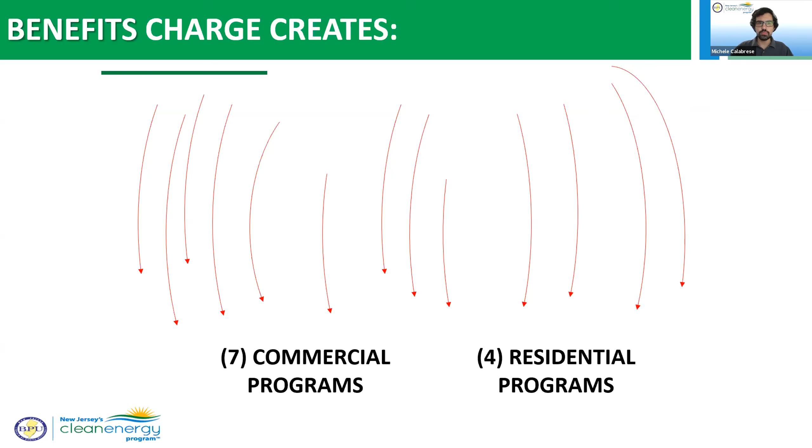We have rebates for existing homes. We work on both existing and new construction. And on the existing side, you have your prescriptive rebates, which is installing X piece of equipment, homeowner gets X rebate. And we also have performance-based, our home performance program, which is whole home solutions. So things like air sealing, insulation, plus HVAC measures.

And in New Jersey, we're really fortunate to have probably the most generous rebates. So we have up to a $4,000 rebate and 0% financing up to $10,000. So just wanted to mention these.

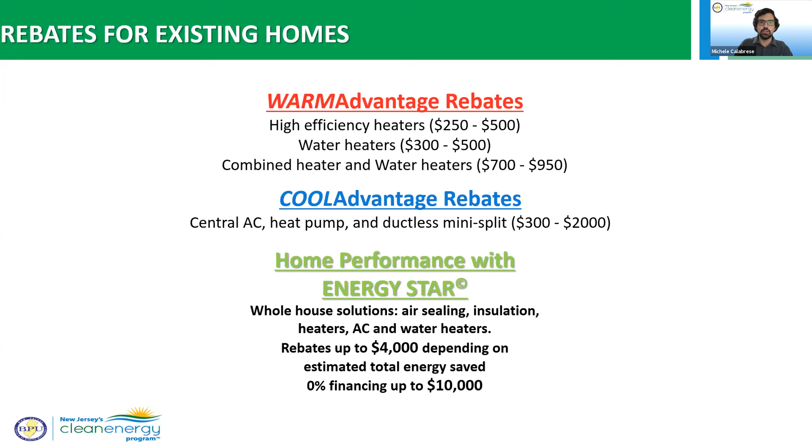They're always worth knowing. Not everyone's always building from the start, but with residential new construction, the way our program works is our homes are evaluated by qualified participating raters credentialed through RESNET. And these rating companies work with the builders to build or reconstruct homes to energy efficient standards. So we can also have gut rehabs in this program.

And essentially the rating company, their job is guiding the builders through every step of the way. So they're making sure all the paperwork's on time. They're making sure that all the checkpoints are built. And they're really alleviating the paperwork load, because we all know with rebate programs, with permitting, paperwork's the biggest problem, right? Everyone hates paperwork. So the raters are there to help. And then the builders are receiving incentives for building energy efficient homes.

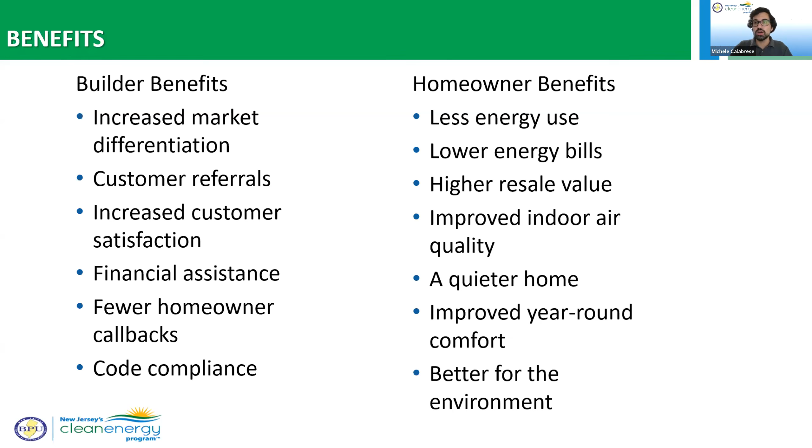We've been in our homes for a while, a lot of us, and the idea of being comfortable in your home and how much more comfortable these energy efficient, zero energy, passive house homes are, it's a huge deal. We all know that room in the house that's too cold or too warm this part of the season. It's just something we're starting to notice because we've spent a lot of time in our homes and we might be here a little bit longer. So those are just things that we always love to highlight.

As far as eligibility, pretty much, you name it, it's eligible. Custom and production homes, single family, townhouses, and then multifamily on both the low rise and high rise. So if you're building in New Jersey, there's probably some sort of fit for you.

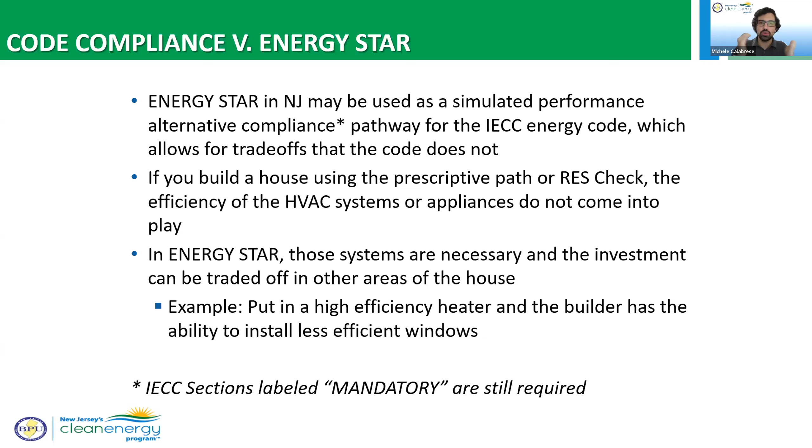So with this program, with our code compliance versus Energy Star, one of the things builders really like is we give them a little bit of flexibility. So they are able to just maybe change a few things in the code; obviously you can't change mandatory things. But one example, they could put in a high efficiency heater and then the builder has the ability to install less efficient windows. Obviously it's not something you do in a passive house, but just something we'd see typically on our code compliance and Energy Star, giving the builder a little bit of flexibility to work in the program.

Energy Star homes, as far as it goes with homeowners, these are great because homeowners know what Energy Star is. They've seen the logo on their fridge and they go, is that the same thing? And yeah, it is. And these homes are designed and built to standards well above other homes on the marketplace. They're not as efficient as passive house, but they're a really good intro point. And they're better quality, comfort, and durability. And they're going through inspections, getting checkpoints, and they're increasing that home value in the future.

We also have our zero energy ready homes. And these are similar to passive house in a lot of ways, right? These are a symbol of excellence in energy savings, comfort, health quality. And these homes are so energy efficient that all or most annual energy consumption can be offset by renewable energy. And just like passive house, these are the homes of the future. These are what we want to see everyone building to. Passive house, zero energy ready homes, those efficient homes that really lower the carbon footprint and they lower the amount of energy used. Because like Sean said, the building stock uses a lot of energy in our state, and that's true everywhere.

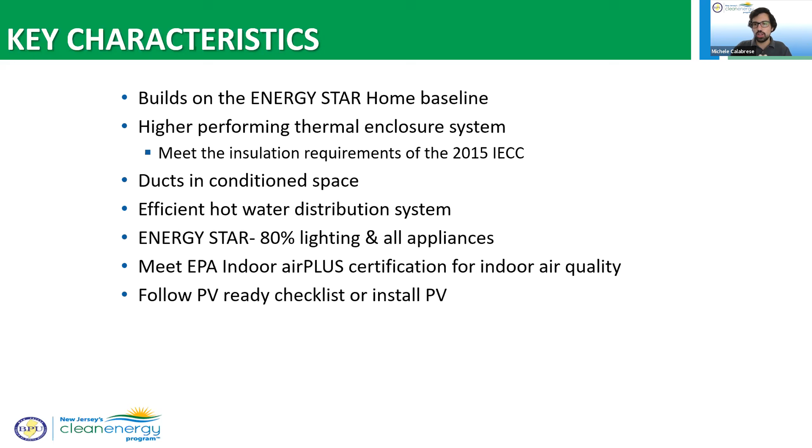And the key characteristics on a zero energy ready home, you're building on the Energy Star home baseline, but it's a higher performance thermal enclosure. You also have really efficient heating, cooling systems, as well as lighting and appliances, and they're meeting that indoor air quality Air Plus certification. So the homes are, again, nice and tight. There's a lot of great indoor air quality. If your home's not tight, leaky and drafty, it's cold, but a lot of contaminants get in, can flare up asthma, things like that. And your typical homeowner doesn't really think of these things. So it's just something that we always love to mention. And they're all ready to install PV, if they're not already installing the photovoltaics.

So the incentives, and I'll just go through these quickly just to give you an idea of what we do in New Jersey. So basically every single level, Energy Star, zero energy ready home, and zero energy ready home plus renewables, and I'd be pointing at the screen normally, but our new virtual world, there's a baseline incentive. So on Energy Star, you get $1,000 no matter what, if you're doing a single family home. For zero energy ready, it's $4,000. For zero energy ready home plus renewables, it's $6,000. And then we give out a performance-based rebate on top of that. So $30 per MMBTU saved. And this is based on a model, obviously, since it's new construction. So the more efficient a home is, the more money towards that work. And the builder, they're getting that money.

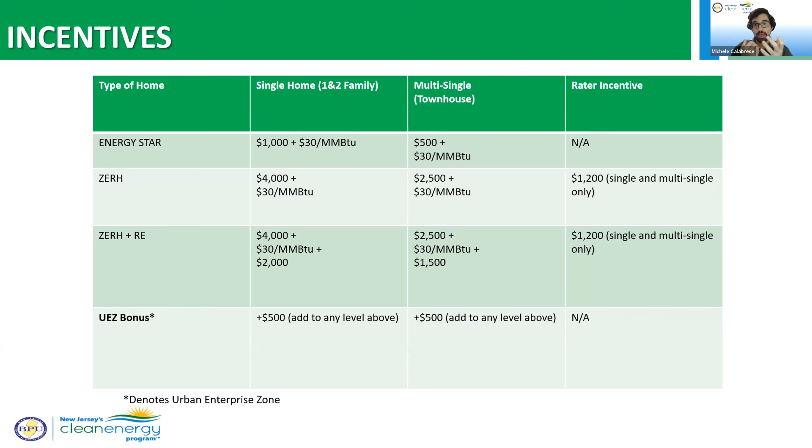So they're incentivized as well, because we also have incentives for multifamily. And these can be pretty lucrative. So you see $500 there for Energy Star. These are per unit. So if you're doing large projects, these really add up. We have zero energy ready home for multifamily as well. Not for multifamily high rise, but it's on that zero energy ready if you're doing a smaller multifamily home.

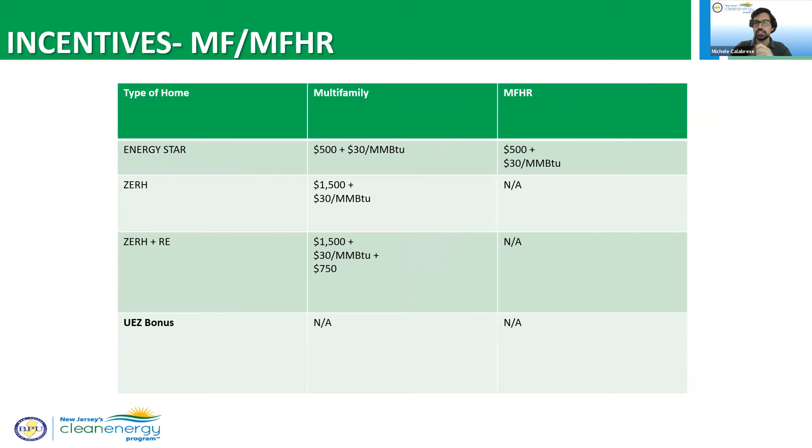This is another program I always love to mention. If you're building in New Jersey and you've participated in our program, we have co-op marketing for builders. So if you know any builders who are doing work and want to participate in our program, it's a 50-50 cost share for eligible marketing measures. So basically up to $50,000 in marketing initiatives. Let's say they're doing some sort of print ad or television ad. They're doing a $5,000 ad. We'd refund them $2,500. So if they're working in Jersey and participating in our program, there's free marketing dollars out there for them.

And there's really no reason not to take advantage of something like that, because we always want more marketing for these programs. We want people to know about them, to be excited about that energy efficient standard, because we all know that homeowner awareness is what drives the market. You know, builders here in this room are probably more on the energy efficient side, more into this, but a lot of your common builders are kind of like, we've been doing it this way forever. Why should we change? So homeowner awareness, them being aware of what's out there, that's what drives the market.

But our programs, we're really fortunate to have great rebates, and they're very exciting programs. And we're pushing the standard forward with Zero Energy Ready. And that relates to Passive House, right? These are the homes of the future. We want people building these homes.

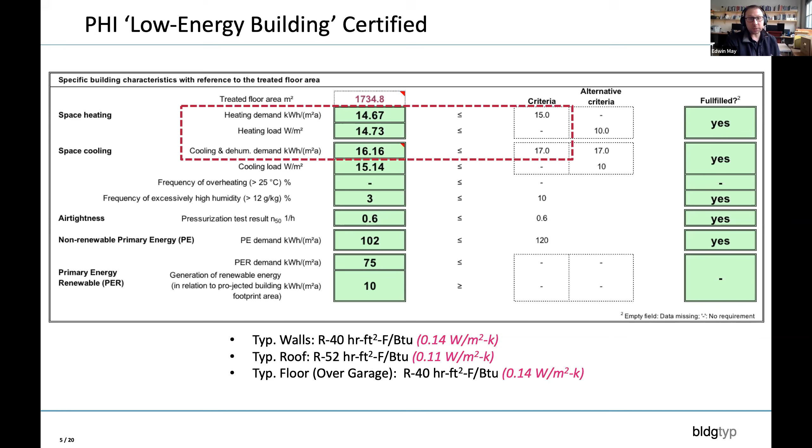So this project was certified to the International Passive House Institute certification, and for those who aren't familiar, passive house certification is just another type of green building certification, very similar to LEED or Living Building Challenge, Energy Star, as we were talking about earlier. It's another green rating system that prioritizes energy conservation, as well as health and durability and comfort of the occupants. So it's a relatively narrowly targeted certification that really prioritizes those few elements and does a really good job at those. We've been working with the passive house standard for about a dozen years now, and had a lot of experience with all types of buildings. This was our first, though, of this scale for sure.

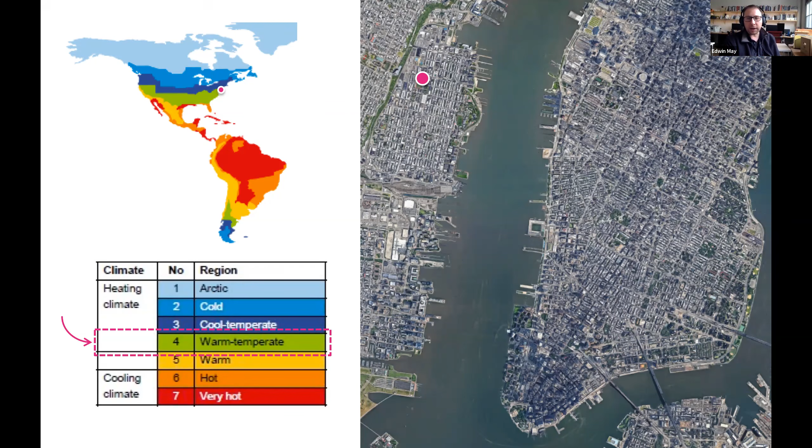And this building had a lot of challenges compared to some other projects that we typically work on. Number one, this building is in a very dense urban environment. So if you're not familiar with Hoboken, New Jersey, just across the river from Manhattan, it's about as urban as it gets. When you think city, this is what you're thinking about. It's in a warm temperate climate as far as PHI is concerned. So we have to struggle with both heating, but also cooling and dehumidification. Of course, in a climate like New York City, dehumidification is a really big piece of the puzzle. And as I said, a dense urban neighborhood.

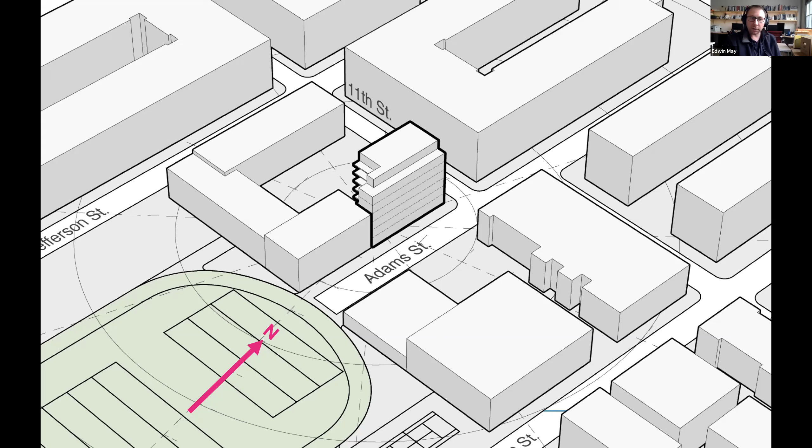This is an infill project. It's not a greenfield site. We're not out in the middle of a potato field with all the ability to orient the building however we want. We had a north and east facing site, and that was how the building was going to be. Almost no useful solar gain on the project. That's actually okay on a project of this sort. And we had all sorts of challenges when it comes to the actual site itself. So right out of the gate, not terribly optimal as a passive house, right? We had a lot of constraints when it came to the site, not a lot of good solar orientation. Okay, fine. We're going to work with it. There's nothing you're going to do about the site. The site is the site. You're not going to spin the street grid of the city.

The other real challenge, or one of the other real challenges on this project, was from a compactness perspective. So if anybody here is a certified passive house designer, in the training we go on and on about compactness of the building and how it really helps us to deliver cost-effective passive houses if we can form the building from the very beginning in a compact shape. Well, for all sorts of reasons, a lot of them related to the specific site, the street wall, as well as the zoning, and then, of course, flood issues in Hoboken.

For all sorts of reasons, we were not able to build a terribly, quote unquote, compact building. So obviously we have to hold the street line on the north and east side there. We have some zoning setbacks to deal with. We want to carve out some outdoor space for the people who live there. And then we take the whole building and we lift it up off the ground.

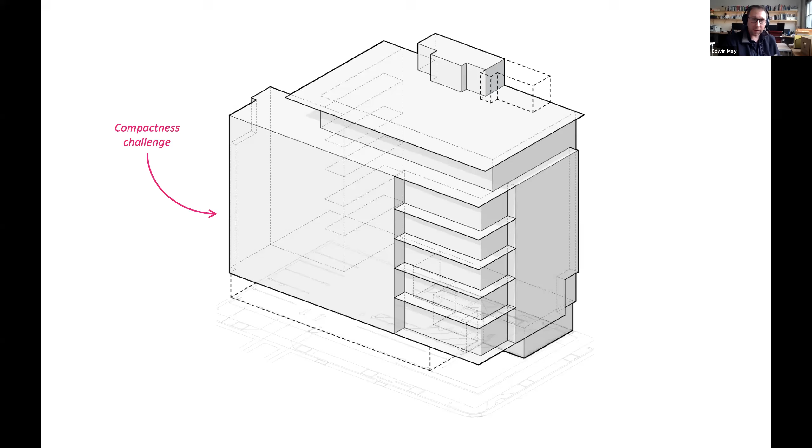That's very typical in a place like Hoboken that suffers from regular flooding and of course suffered very badly during Hurricane Sandy. So right out of the gate, we have bad orientation or challenging orientation, and we have a challenging form factor because we're very exposed as a building. But again, these are kind of just things that are set, right? We don't have the ability to control these things. This is what the building is, and we have to build or engineer our passive house to accommodate.

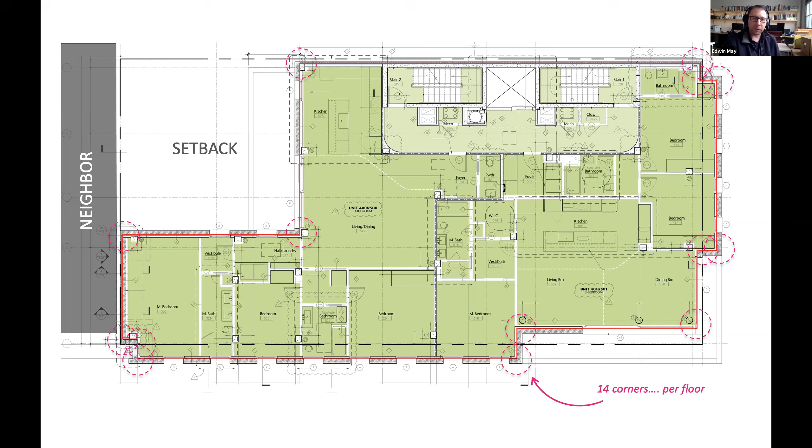Just quickly, the floor plan of the building, you can see a representative floor plan here. Again, neighbors on the south and future neighbors off to the west side. In this drawing, north is to the right. So you can see the street front on the bottom and street front on the right-hand side there. Difficult form factor again for the building, but again, all related to the context of the building and how it was shaped to form itself to that urban site. But you can see the core and you can see the nice big living spaces there, which were great.

And then lastly, of course, the biggest challenge was that this was going to be a commercial property, commercial construction style property, meaning concrete floor slabs, steel stud construction, not very passive housey, all things considered, right? When we build single family home passive houses upstate or outside of the city, we're using things like wood and cellulose insulation, fibrous materials, much more accommodating to designing out things like thermal bridges. We'll talk a little bit about thermal bridges if you're not familiar with that term.

Very challenging construction type, in addition to really challenging construction environment. Very constricted site, not a lot of room, not a lot of space to move around. Really, really a difficult environment to build a building in at the best of times. And we were asking these builders to go above and beyond and do something that was really out of the ordinary. So hats off to the builders, to John's team for managing that side, and the actual construction implementation team. They did a great job with all of the crazy curveballs that we threw at them in terms of the actual fabrication of this building.

And of course, from the engineering side, we did have to accommodate some of the things that were just set. We're going to use steel stud. We're going to use concrete floor slab. We're going to use a lot of steel. It's a commercial property in a dense urban environment. So we just had to work around that from a passive house perspective.

Now, why is that challenging? Again, if you've gone through the passive house designer training, you're going to be familiar with this term thermal bridge. But if you're not, a thermal bridge is just a break in the insulation layer. That's the easiest way to think of it. And so think about something like a steel stud. If you're going to insulate around the steel stud, that steel is going to pass right through the insulation layer. So you're going to have a significant amount of extra heat loss as a result.

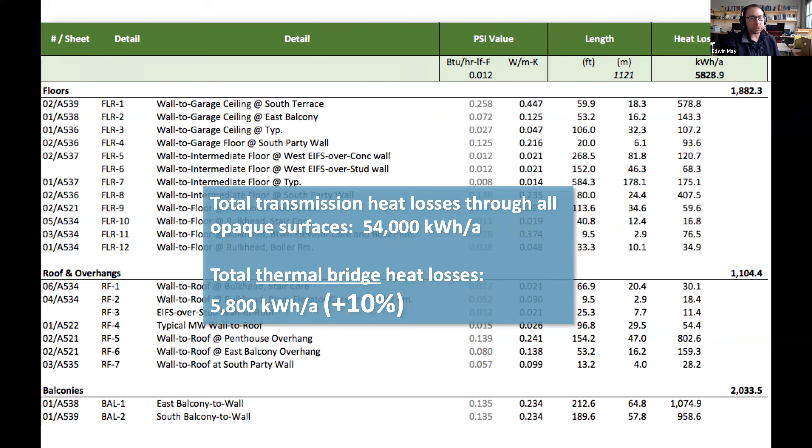On this specific project, we actually found that there was about 10% additional heat loss as a result of all of those thermal bridges. And that's after a huge amount of work by John's design team and our office to try and optimize these details. So this is after an incredibly rigorous, very laborious back and forth around the actual design and optimization of these details. So even in the best case, we're still seeing about 10% additional heat loss as a result of those thermal bridges. And so we just have to design that in from the beginning. We have to do the engineering for the passive house design, knowingly incorporating those details.

So how did we build the building? Well, the building is built with steel stud backup wall. And then essentially what we did was we put a thick wool sweater around the entire building. So passive house prioritizes reducing heat loss in winter, reducing heat gain in summer. And the main way that we're going to do that is through lots and lots of insulation.

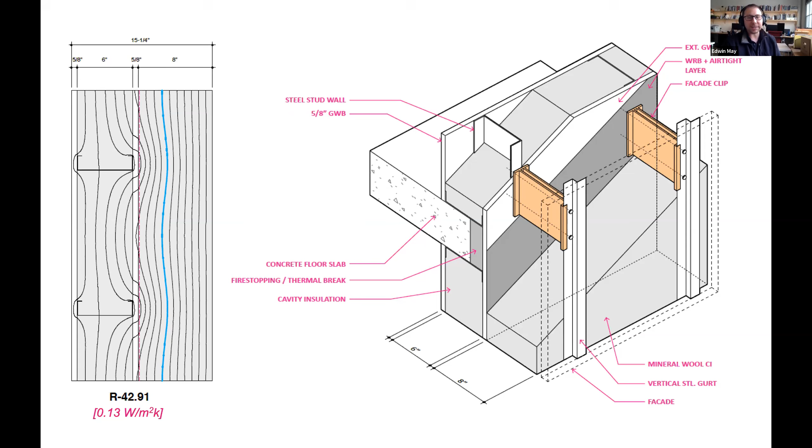I know that's not very sexy. I know that's not very exciting, but the fact is that insulation is probably the best, most cost-effective, easiest tool that we have in our toolkit to reduce energy consumption in buildings and improve thermal comfort. And so we put this big, thick wool sweater on the building. We use low conductivity facade connections. We design out those thermal bridges as much as possible with the recognition that it's still a commercial property development at the end of the day.

Here you can see the construction team actually implementing that exterior facade wall, 8 inches of mineral wool over that steel stud backup wall. And then we have this sort of floating facade, which is only attached back to the building by use of these low conductivity fiberglass facade clips. So if you're not familiar, that's a system made by a company named Cascadia, obviously hugely laborious, right? A lot of work, a lot of steps, very difficult. And the first time that these fabricators and builders were implementing this technique.

So again, real hats off to these guys. They did a fantastic job with it, the very first time they'd ever even set eyes on this system. So really, fantastic in terms of the final. But it was very challenging. They really did have to work at it, and it was very difficult. There's definitely a learning curve with a lot of this implementation.

Here you can see the team actually installing, this is on the back side of the building there, 2 layers of 4-inch thick mineral wool insulation over the exterior of the building. Mineral wool insulation, if you're not familiar, it's a fibrous insulation essentially made of basalt stone. It's non-combustible. The pests don't like it. It's a great material to use on the outside of a building, like the one here. Very durable, very resilient in many respects, and obviously really works very well as an insulation product.

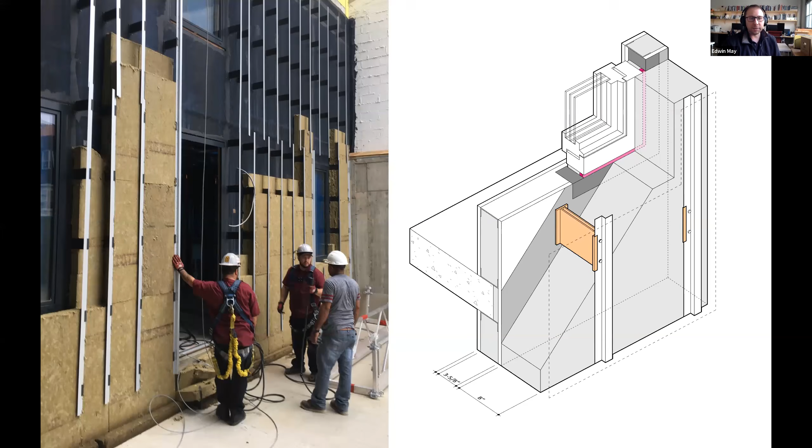Now, one of the other techniques that we use in Passive House world to reduce energy consumption, improve thermal comfort, improve durability, is to rigorously air seal our buildings. So in addition to super insulating the buildings, we want to make sure that they're as airtight as possible. That doesn't mean that you can't open the windows on a beautiful day. On a beautiful day, throw all the windows open. But it does mean that in a cold winter day, or a really hot, humid day, we have the ability to seal up the building, and we're able to manage the moisture that's coming in and out of the building, riding on those air streams.

And so rigorous air tightness was one of the other things that we had to implement here as part of the Passive House standard. And again, hats off to the construction team. They did a great job meeting those incredibly rigorous Passive House air tightness targets.

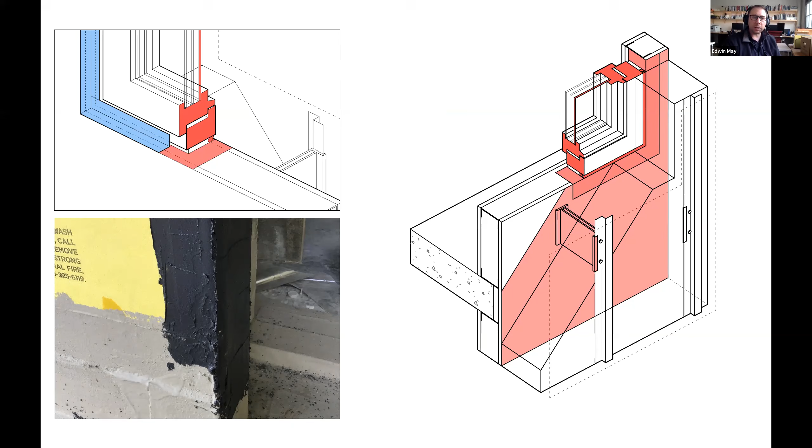Because of the way we designed the building, we were able to use the weather resistive barrier, the WRB, which is the main waterproofing layer, as the primary air tightness of the building with just a few modifications to the typical details. So we went a little above and beyond, but not a huge change in the way that we went about the air tightness of the building, just a little bit of thinking ahead and planning ahead.

Now, when it comes to the windows, I think this is a really interesting detail. I like to show this mainly because it wasn't something I designed. This was something that the fabrication team and the installers came up with. The goal here was to take a little bit of the insulation and overlap it over the windows themselves. So when it comes to window installation and detailing, one of the techniques we use in Passive House world is to take some insulation over the face of the frame. That's going to help us improve thermal comfort, improve temperatures, reduce condensation risk, as well as reduce heat loss, so thermal performance.

And the goal here was to take that insulation over the face of the window, and yet we still had this really deep reveal on the sides and top of the window. We had to somehow take the cladding and return it into that opening there without actually causing a thermal bridge. And what the team came up with was this detail where they have that floating steel angle, which is actually attached to the exterior structure and cantilevers back towards the building.

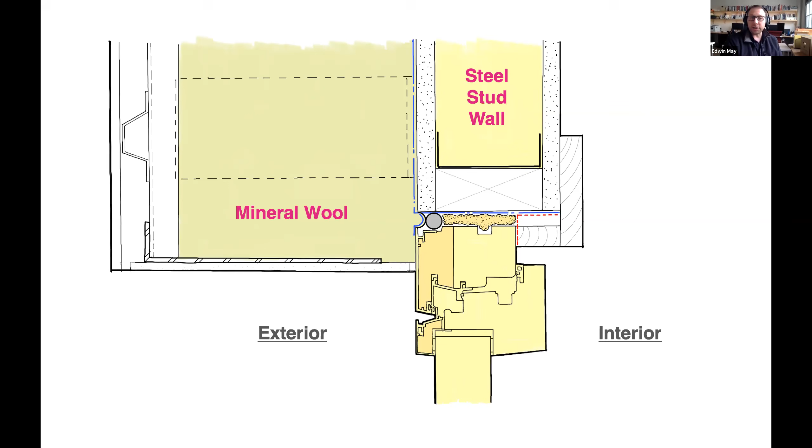It's able to fully support all the cladding and the trim without actually attaching or touching the building. So we don't have any thermal bridge in that case. So we're able to get the full improvement or the full performance of that overlapping insulation there.

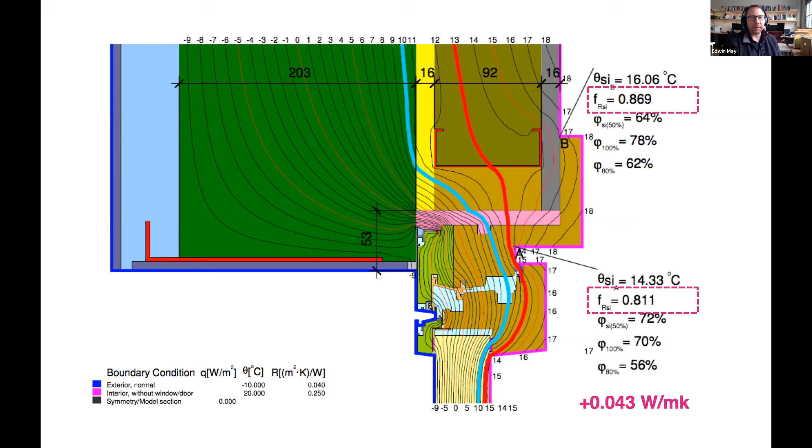This is an example of the type of simulation and assessment that we do on these types of projects. Every detail is calculated and simulated for both interior side surface temperatures, so looking at condensation resistance, as well as overall heat flow and interstitial temperatures. So these lines here, if you're not familiar with these types of graphs, these lines show interior temperature distribution. So it basically shows you how the thermal energy is moving through the details. So we do this for all the different construction details, window details, etc.

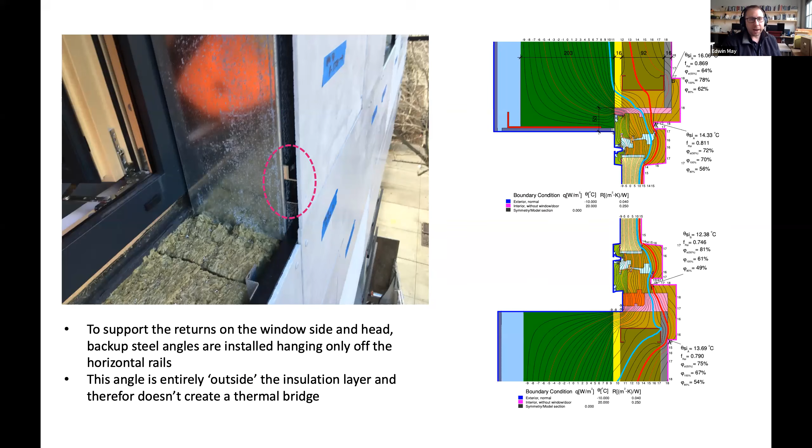But again, here's that detail. I like this a lot. So you can see that steel angle cantilevering back towards the building, never touching the building, never connecting. We don't have any disruption of our insulation layer. So we get very good installation thermal bridging for our windows, very high surface temperatures, and really nice finishes. We get this really nice deep exterior wall, really nice shadow lines, gives a real weight to the building, which I think is really fantastic.

Just in terms of implementation of airtightness, one of the things that we like to do wherever possible is mock-ups. And so this is the team actually mocking up and trying some of the airtightness detailing before rolling it out on the full building. This is obviously really important when it comes to commercial style buildings with lots and lots of windows to detail. You got to make sure that everybody's happy with these things beforehand before you progress to do the other 1,000 windows. And oftentimes you can't work that out on paper entirely. You got to go try it and see how it works.

And so a lot of back and forth with the team to actually optimize these details, both for thermal comfort, condensation resistance, but also for buildability, right? We want to make these details accommodating to the actual reality of the on-site construction there.

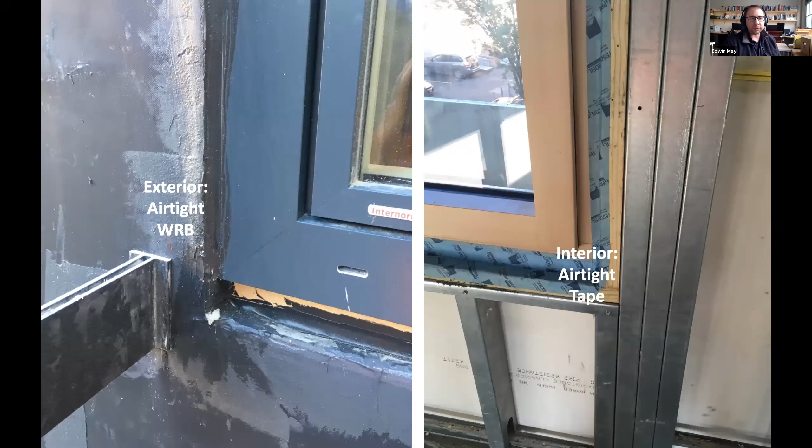In terms of the actual detail, you can see here, belt and suspenders approach. We let the team do their typical exterior goop-based sealing. So they do like a sealant bead on the outside of the building. Fine, that's all per warranty. We're not going to monkey around with that. But what we will say is give us a little extra. So on the interior side, let's supplement that goop-based sealant with some really robust and flexible tape connections, right?

So as the windows are slammed and move around, as the building shifts around, we have a really robust and flexible connection for airtightness on the interior. In addition to that exterior waterproofing, that's all per warranty. We're not going to monkey around with that and make guys change that, but just give us a little extra, right? So we were able to design that detail in a way that was reasonably easy for the team to implement.

And then just a couple last bits here. I'll talk a little bit about some of the thermal bridging. We'll talk about ventilation, and then we'll finish up and leave some time for questions here. So thermal bridging, as I said, a thermal bridge is anywhere that we have a disruption in the insulation layer, a break in the insulation layer. So things like steel studs, for sure, concrete balconies, that's another really common place for thermal bridges.

And so one of the things we worked really hard on this particular project was to nip off the heat flow through those concrete balconies. We do that through these structural thermal breaks. So these thermal breaks get cast into the concrete floor slab at the time of construction, and it very, very effectively retards heat flow from flowing out of the building into those concrete balconies.

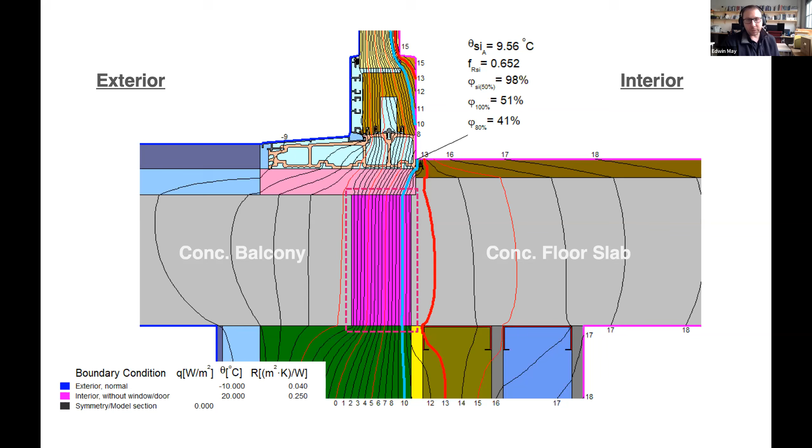But basically everywhere that we have these concrete balconies, which protrude through the insulation layer, we cast in these thermal breaks, these structural thermal breaks. Now, the one thing about these thermal breaks, they work great. You're not going to just drop them in at the last minute. These are obviously a part of the structural engineering. You have to plan for this early on.

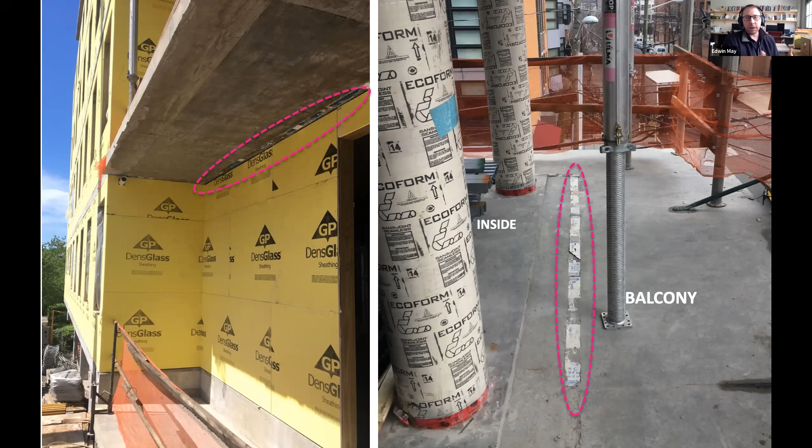So again, real hats off to the structural engineer on this project. Again, didn't really bat an eye at the craziness that we were suggesting here, took it all in stride and was able to successfully incorporate these really, really well into the structural scheme of the building, even a difficult building of this sort. So you can see them here in a couple different places. So we have those guys installed. And this was actually a photo that I took on site.

You know, in a typical construction, we would see a whole band of heat loss on the outside of the building and a zone of very low surface temperatures on the inside of the building. Right? Those low surface temperatures, the result of excess heat flow, those would be areas where we would likely see thermal discomfort, but also condensate formation, potential mold growth. In this case, none of that, right? We just have a nice warm interior, super comfortable, super dry. And on the outside, we have very cold temperatures. It's not perfect. It doesn't perfectly eliminate heat transfer, but does a really, really good job of it.

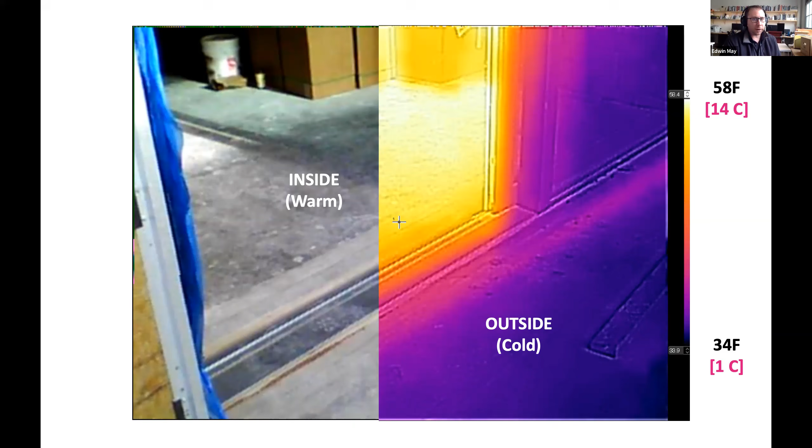One other place that we really wrestled with on this project in terms of thermal bridging was actually on these sort of blind slab edges. So we have a building to the south of us, and we had to build up against it. But unlike in historic projects, you know, you think urban buildings, they're joined with a true party wall. Well, not so much anymore. Nowadays, when we build these types of buildings in urban environments, for all sorts of structural reasons, the code requires that we actually have what's called a seismic separation between our building and the next.

So unlike old-fashioned buildings where the party walls are true party walls and the buildings actually join, nowadays we have a pretty good sized gap in between all of our buildings. It's big enough to allow a lot of cold air in, but it's not really big enough to allow a person to get in there and build it properly. So this was one of the real challenges that we had on this project, was how are we going to build these blind slab edges on the backside of the building here?

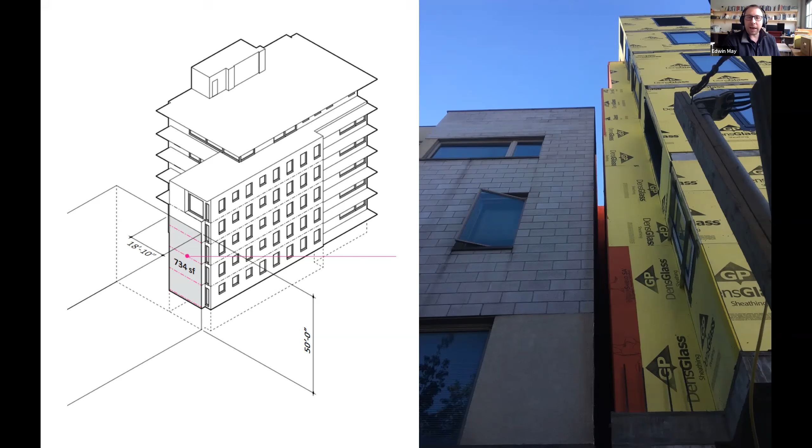And John's team came up with a really nice solution to this using these CH studs, which is a method used to build blind shaftway, fire rated stud walls. And the only real trick that we had in this case was that we had to cast in place one of these structural thermal breaks that we use on the balconies, except we had to use a special version of it, which is not for balconies, but for these slab edges. You can see here, there's no sort of extension out to the balcony side. Instead, it turns back on itself and just allows us to get that structural thermal break at that slab edge.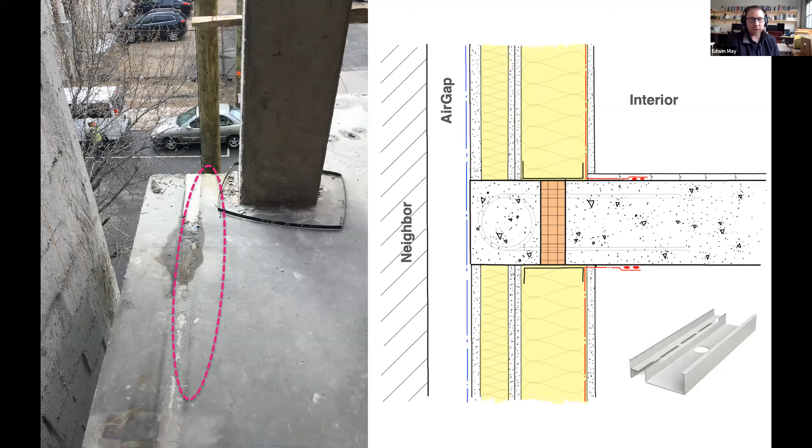Allows us to fully isolate that slab edge from the rest of the building, get good thermal continuity there, get good interior side surface temperatures, low risk of mold growth or moisture condensate formation, and the rest. Challenging, to be sure. Again, the installer teams really had to figure out, how are we going to build this from the inside out without actually being able to get a person out in that weird little gap, very, very challenging. This was something, again, that the installers came up with and John's team came up with on the actual site there during construction.

And then just lastly here in the last 2 minutes, before I know we're getting long here, just want to talk a little bit about the ventilation system for the building. In addition to a really, really robust envelope with excellent windows and low levels of thermal bridging, good air tightness, and lots of insulation, one of the other core strategies for building a successful passive house building is to implement a dedicated fresh air ventilation system with heat recovery.

So we want to bring fresh air in all day, every day, and we want to take stale air out all day, every day. And we want to do that in a way that minimizes energy consumption and the risk of over drying the interior air. Obviously, we all know a lot about the risk of over drying interior air and things like virus growth and respiratory problems. But that's been a core part of the passive house world for many decades now. And so we implemented just such a strategy here.

Because this was a condominium project, instead of having one big ERV or HRV, a heat recovery ventilator or energy recovery ventilator that served the whole building, which is maybe how we would typically do a building of this size, instead we decided to use a distributed strategy where each unit got its own ERV or HRV, its own ventilation unit with heat recovery that brings fresh air in all day, every day, and takes stale air out all day, every day, resulting in really, really high quality indoor air, very healthy environments.

The one challenge here was that we didn't want 1,000 penetrations coming through the facade of the building. Obviously, you saw the facade of the building, beautiful facade. We didn't want a bunch of penetrations just poking through willy-nilly everywhere. And because of the location of the HRVs, it was also going to be really difficult to reach the facade of the building. So we actually used a strategy here which I don't think I've seen on other projects. This was definitely something of an experiment.

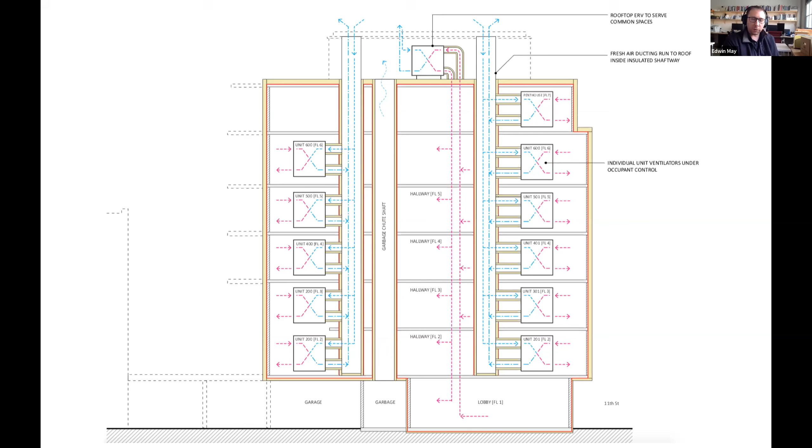We used these two shaftways through the building to actually bring fresh air in and take stale air out. And so rather than penetrating the facade of the building with really long duct runs, instead we used very short duct runs and we connected to these insulated and airtight shaftways through the building. And we had lots of those connections, one for each unit in the building. We did have one rooftop ERV that served all the common spaces in the building, the lobby and the hallways, etc. And so that was up on the roof. But for the most part, all of the actual dwelling units are served by their own individual ERV with its own filters, its own controls, and its own access to the outdoors there.

This was quite a complicated detail to work out. Again, a lot of this was worked out on the site with the installer team, with John's design team. You can do as much of this detailing ahead of time as you can, but then when it comes time to actually build it, it's always a little different than you thought it was going to be. So a lot of this ended up getting worked out on the job site. Again, hats off to the design team and the installer team for flexibility there.

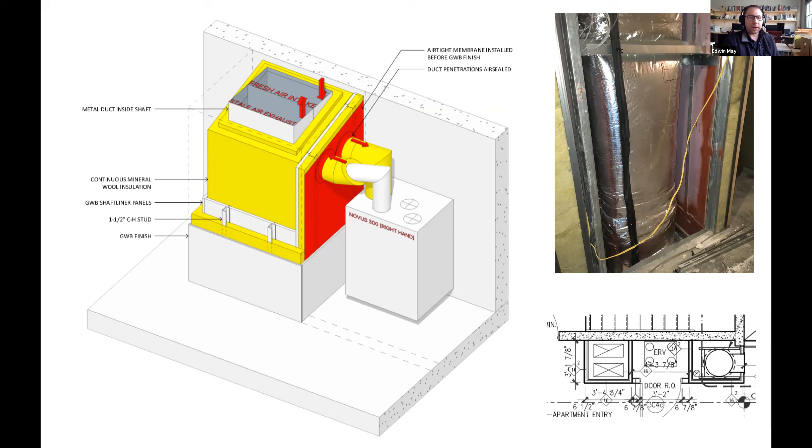But essentially, we have the ERV and it connects over to these shaftways. The shaftways, of course, had to be really well insulated and air sealed, both to prevent condensate formation, any risk of mold growth or condensation there, because obviously you have ducts full of cold air running through a building, but also to reduce the amount of heat loss that we saw in the building. So a lot of coordination, a lot of back and forth, a lot of different techniques that we used there to implement that, but it worked really well in the end.

And then just the very last thing here, one thing that I've never had to wrestle with before on a building, this was our very first time ever sort of wrestling with this, was the garbage chute. And you think, wow, that's so stupid. Why is that even, it's such an incidental thing? Well, not really. You have a giant steel tube full of outdoor temperature air running through the middle of your passive house building. So you have to think about, how are you going to air seal that?

How are you going to insulate that? How are you going to avoid condensate formation and potential mold growth? And of course, how are you going to avoid the smell from the garbage room coming back into the space, right? The quality of life in these buildings is incredibly high, and we want to maintain that. So really thinking through all of these details is really, really important.

So we experimented with a couple different versions. In the end, we actually built what's called version 1 on this slide. It's essentially an outdoor air shaft that runs through the entire building. There's all sorts of very, very specific code language about how you do these big shaftways. Obviously, these are key when it comes to fire prevention and protection of the interior.

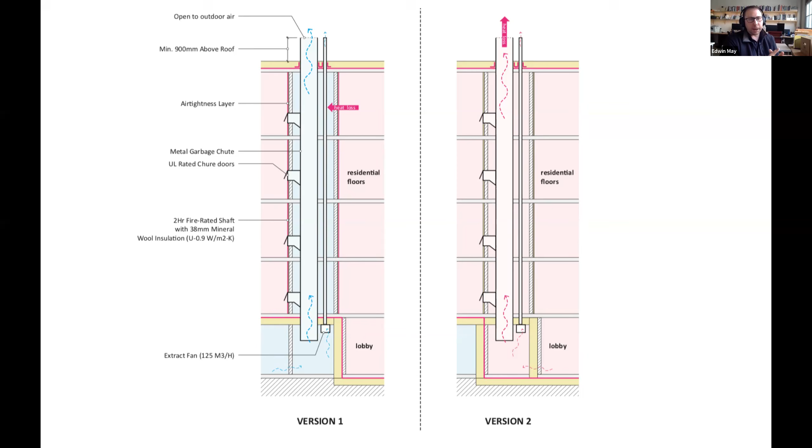And the real weak link in this whole shebang are the doors. It's very hard to get a good airtight and thermally isolated or high performance door to a garbage chute. It's just not a thing that's available. And of course, as you can imagine, you can't really make one on site. These all have to be UL listed components. They have to be really highly tested for fire prevention, because obviously a shaftway like this is, again, a real weak link when it comes to fire propagation throughout a building.

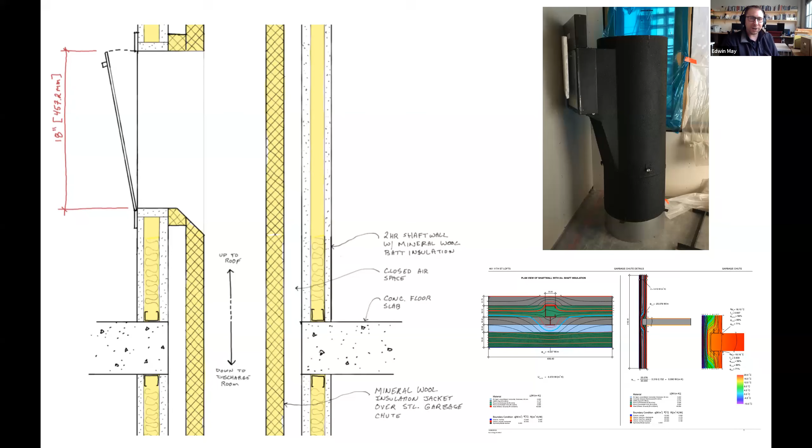So, we did what we could. We weren't able to eliminate heat flow and thermal bridges entirely. So we just design in and accommodate the excess heat loss at those locations. So, do what you can and try. Maybe on version 2, we'll come up with a better solution for the next one. But right now, the garbage chutes are definitely a weak link in the whole strategy there. But we do our design and assessment. We budget it in. We add in the heat flow. We do the condensate assessment, et cetera, and think through.

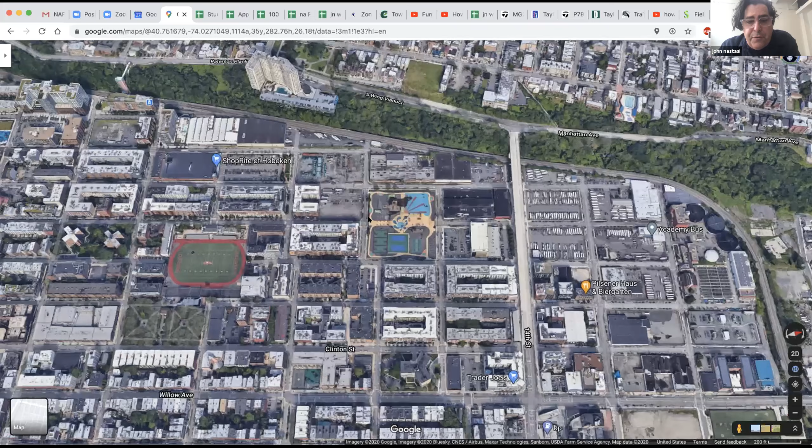So FEMA has come in since Sandy and laid down a series of requirements that we've had to follow. And the city of Hoboken has really gotten on board, especially because of Sandy, in that the whole northwest of Hoboken is sort of this progressive engineering feat. The city has invested $100 million in a 6-acre storm resilient park between 12th and 13th, between Adams and Madison.

So during a rainstorm, we will collect hundreds of thousands of gallons of stormwater, and then the North Hudson Sewer Authority, with its electronic valves, will dump this stormwater back into the sewer system long after a storm event has happened. It's an amazing feat of engineering.

Coupled with that, I'm working with PSE&G right here, and we're in the final months of constructing a fully storm resilient substation for the city of Hoboken. So in the past, every time there's a storm, the infrastructure of the city would flood and everybody would lose power for a week.

And PSE&G, in acquiring property from the city, is building a fully storm resilient substation that's 16 feet up in the air. We were the architects for the project, and it's in the final legs of construction. And then if you see the storm resilient park, the fully storm resilient substation, Candela is right here. So we have a beautiful little enclave, which is a post-industrial section of town that is really kind of embracing 21st century engineering methodologies.

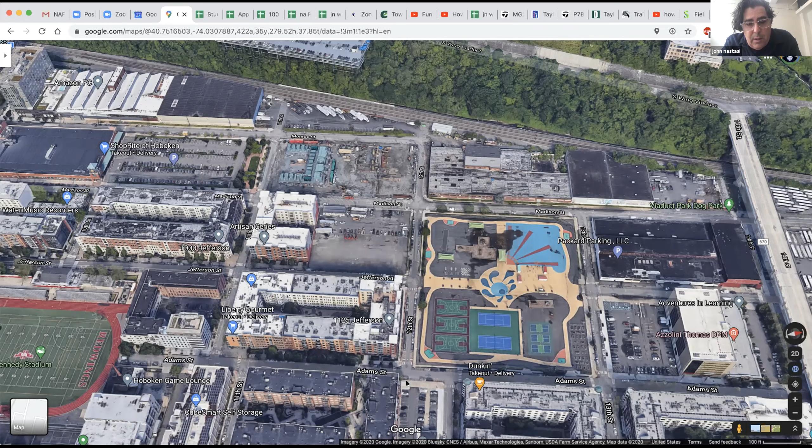So Candela is really a blip on the screen of a much broader effort by the city of Hoboken. And that sort of formed the context for when we approached the city of Hoboken and said, we want to build a 7-story passive house building in a redevelopment zone. And the city, it was Mayor Dawn Zimmer at the time, Mayor Ravi Bhalla now, they fully embraced our efforts and made the arduous approval process as simple as possible.

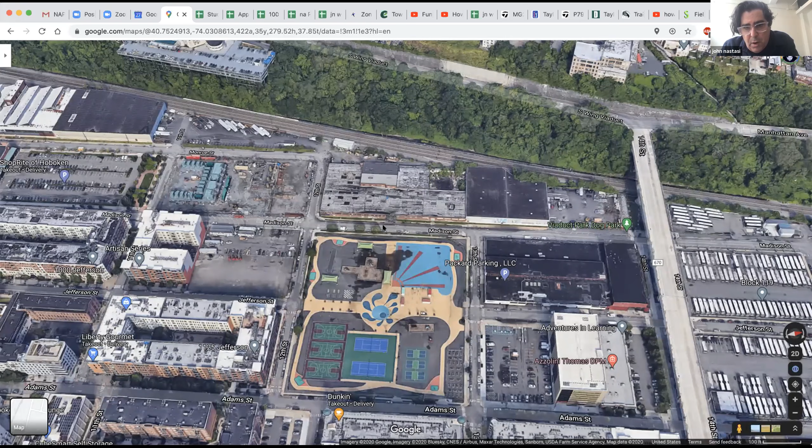So we're starting to develop like an engineered neighborhood over here, and that leads me to my next project, which Ed will get dragged into at some point, which are these 2 city blocks which front the park. So these will be sort of state-of-the-art buildings. Those are coming through the approval process, and it sort of wraps and envelops this park. So these are the kinds of broad things that I'm dealing with while we're diving in and engineering the details at Candela.

And I will say, for all of you architects and educators out there, all of this happened, believe it or not, because Ed and I were building a tiny little solar decathlon house in the parking lot at Stevens Institute. This was where Ed and I taught together at Stevens. This parking lot was our job site for when we built solar decathlon houses. And because we were building the SURE HOUSE here, somebody was walking by in the evening, saw what we were doing, and approached us probably in 2013 or 2014 and said, can you guys build a 7-story version of that SURE HOUSE? So the presentation that Ed gave you came from an opportunity that arrived right from the SURE HOUSE.

So I think the last thing I would say is that, as architects and developers, you always have to embrace any kind of design challenge. People are always putting design challenges at your feet, and you have to be ready to embrace the opportunities that come with these design challenges. So that's the only thing I would like to add to this mix, and I'm sure you have a ton of questions for Ed, or if any for me, that's fine, but thank you.